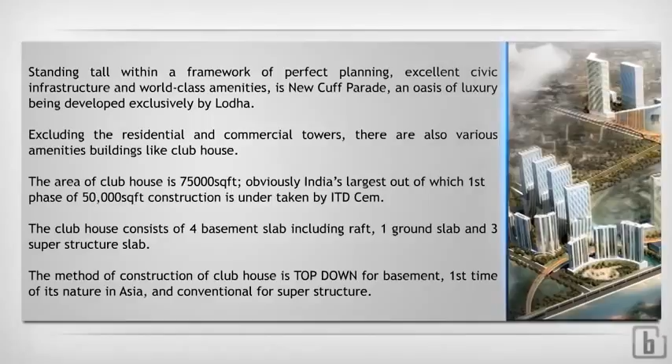ITD Cementation: standing tall within a framework of perfect planning, excellent civic infrastructure, and world-class amenities is New Cuff Parade, an oasis of luxury being developed exclusively by Lodha.

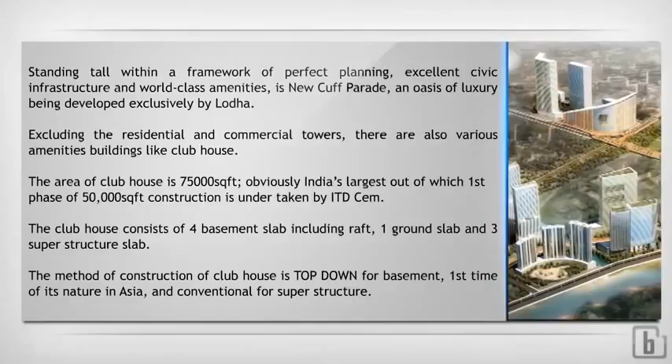There are various amenities, buildings like the Clubhouse. The area of the Clubhouse is 75,000 square feet. Obviously, India's largest; out of that, first phase of 50,000 square feet construction is undertaken by ITD Cementation.

The clubhouse consists of four basement slabs including raft, one ground slab, and three superstructure slabs. The method of construction of the clubhouse is top-down for basement, first time of its nature in Asia, and conventional for superstructure. General sequence of operation for top-down construction. Following sequence is planned.

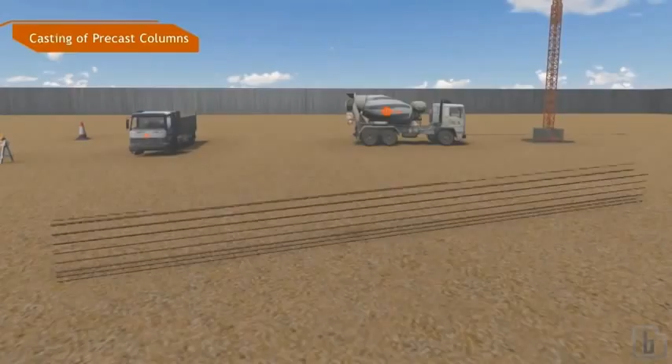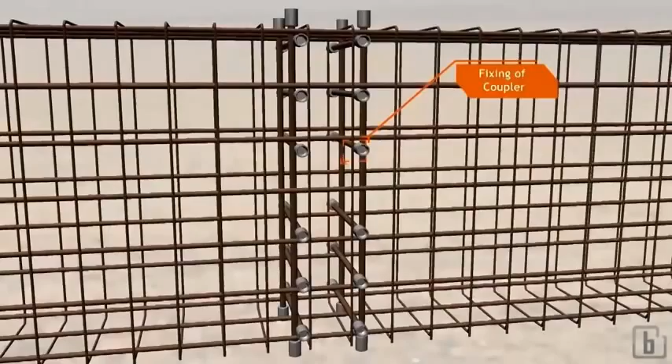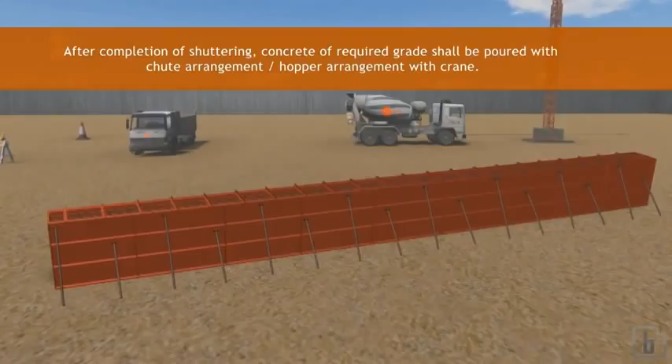Casting of precast column. Reinforcement work shall be fabricated as per approved drawing and bar bending schedule with proper cover block and fixing of coupler at required level. After completion of reinforcement work, side shuttering works shall be carried out with proper dimension and levels with proper support. After completion of shuttering, concrete of required grade shall be poured with chute arrangement, hopper arrangement with crane.

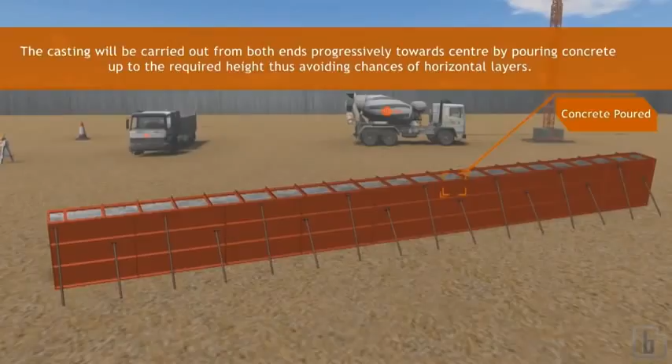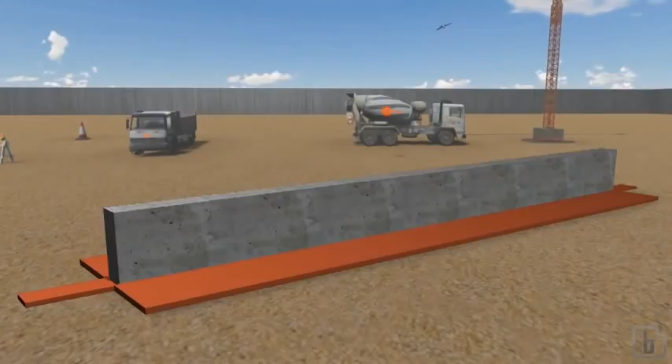The casting will be carried out from both ends progressively towards center by pouring concrete up to the required height, thus avoiding chances of horizontal layers. Side shutter shall be removed after 24 hours, while bottom shutter shall be kept 3 days after casting. This will be re-ascertained by testing of 3 days compressive strength, 40% of the fck of cubes, to achieve the desired strength as per lifting design submitted.

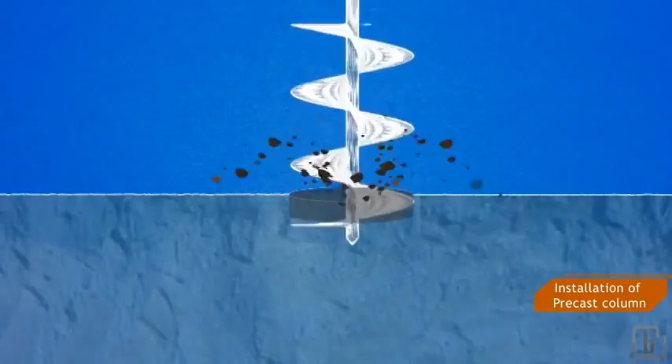Our design for lifting for placing at stacking yard is considered 3 days and for installation of column is considered 7 days. Installation of precast column. On initial completion of approximately 5 to 6 meter pre-boring, permanent liner of 8 mm thick of internal diameter 1300 per 1000 mm shall be inserted into the bore drilled hole with necessary verticality up to weathered rock.

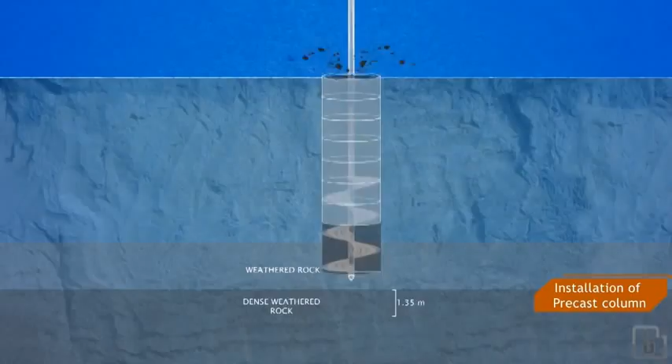The center of MS permanent liner shall be checked prior to commencement of further boring with respect to reference points. The verticality of pile bore will be checked at regular intervals during casing insertion up to rock with reference point as well as bubble fitted with HR 180. Once the permanent liner is centered, further boring shall be carried out with auger and soil bucket till it reaches the final depth as per design and drawing.

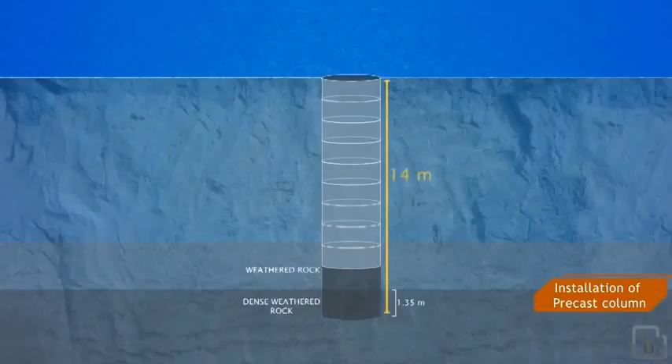The precast column length will be bottom of raft plus 1 meter and pile termination will be 1.35 meter below hard rock encounter. Once pile is terminated, precast column member will be lowered into the pile with the help of crane of capacity 75 MT.

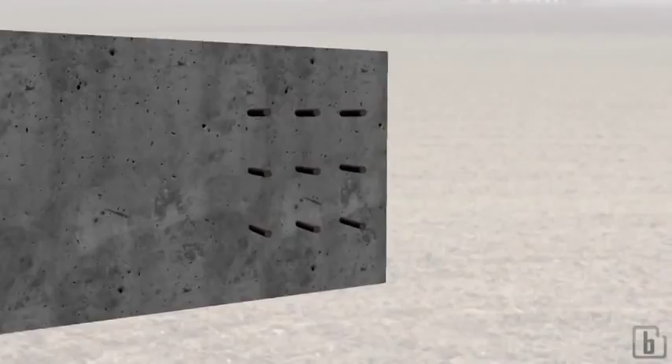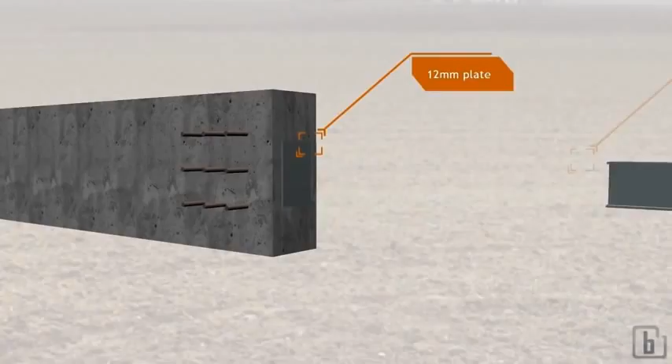After installation of column, the pile reinforcement cage will be fabricated as per drawing with ISMB 300 at center of precast with 12 mm peg plate welded at both ends as shown in GFC drawing. The length of ISMB and pile reinforcement cage will be finalized after borehole termination depending upon site situation.

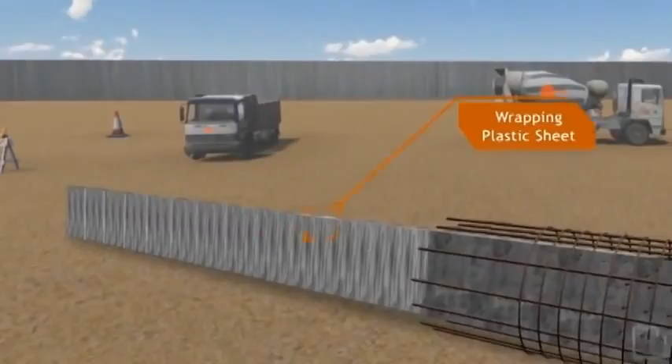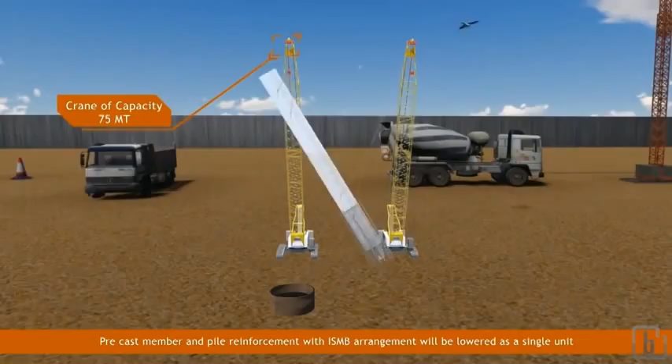Prior to lowering of precast member, it will be wrapped with plastic sheet to have a separation between column and lean concrete which will be poured later. The precast member and pile reinforcement with ISMB arrangement will be lowered as a single unit. During lowering of column, to maintain proper verticality and position of precast member, additional precautionary action of ISMC 150 will be provided at the column corner.

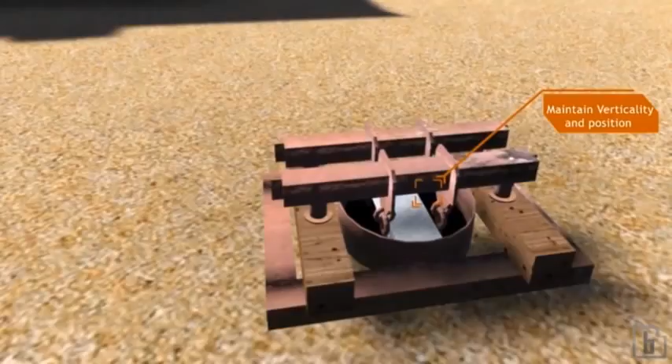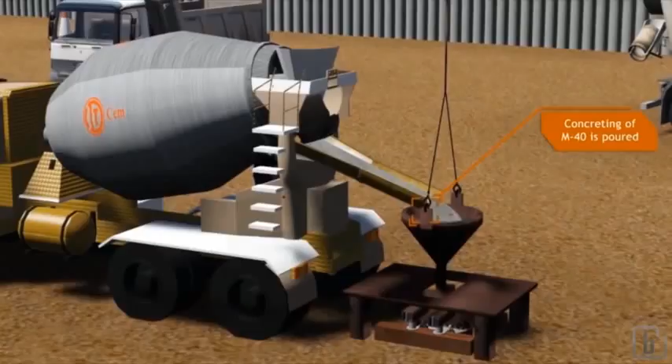Concreting of M40 will be poured up to a specified height of column COL of pile as shown in drawing from bottom to have a proper fixity at bottom. The concrete will be poured up to the pile COL plus additional overflow level shown in the drawing. The level of the concrete will be ascertained by lowering cup fitted with reinforcement steel.

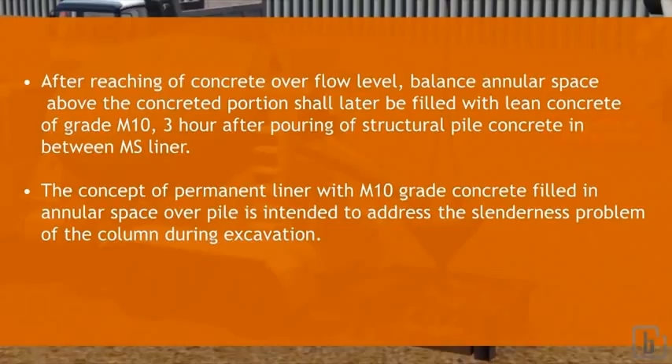After reaching concrete overflow level, balance annular space above the concreted portion shall later be filled with lean concrete of grade M10 3 hours after pouring of structural pile concrete in between MS liner. The concept of permanent liner with M10 grade concrete filled in annular space over pile is intended to address slenderness problem of the column during excavation.

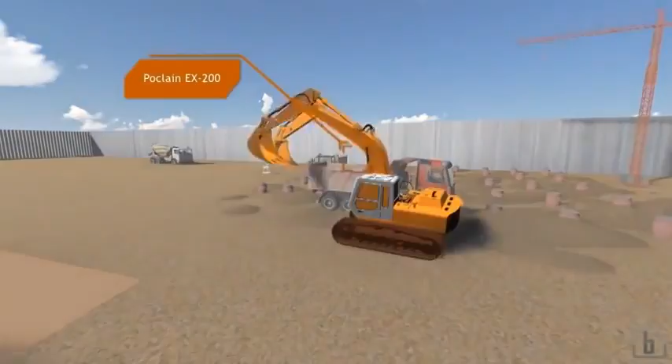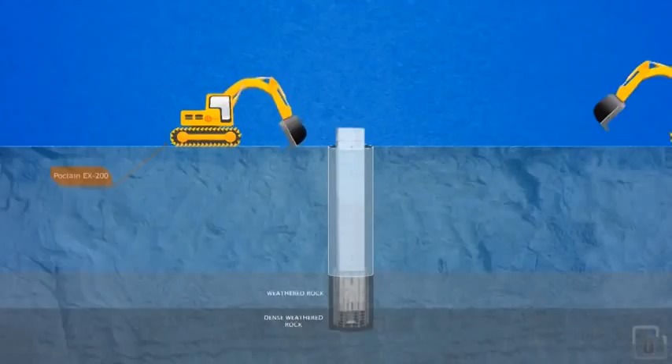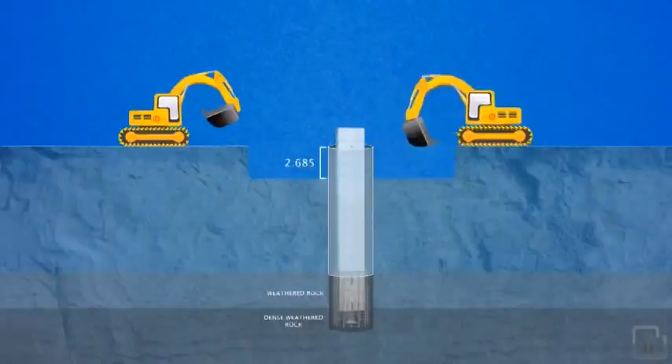Ground floor slab. After installation of column, activity for ground floor slab will be started. For ground floor slab, excavation will be carried out up to level of plus 0.4. After that, the area will be leveled for working platform for receiving rubble soling. Rubble soling. Stone rubble soling will be laid uniformly over the leveled area in one layer of 230 mm thickness.

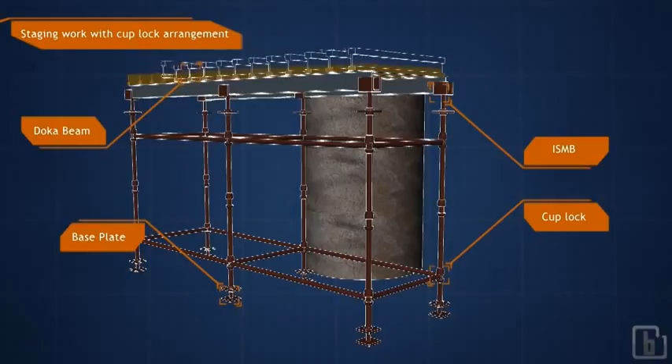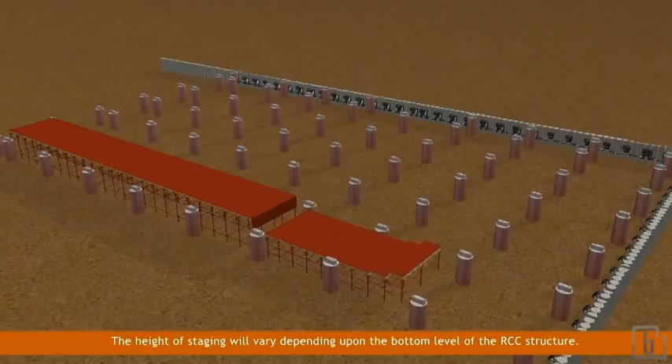Staging and bottom shuttering. Staging work will be started with cup-lock arrangement. The height of staging will vary depending upon the bottom level of the RCC structure. After placing of bottom shutter, as per required level and position, rebar work for slab and beam will commence.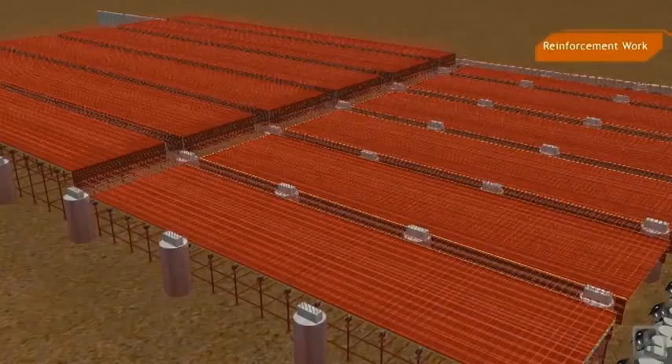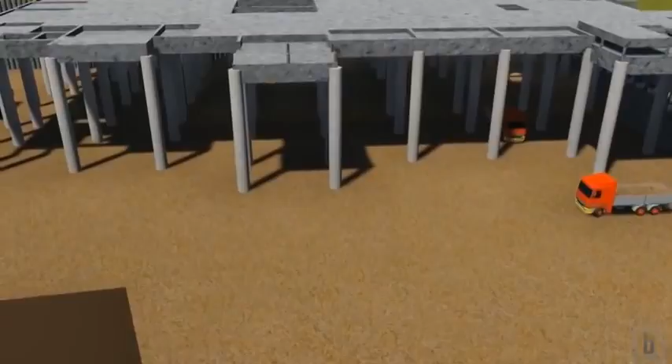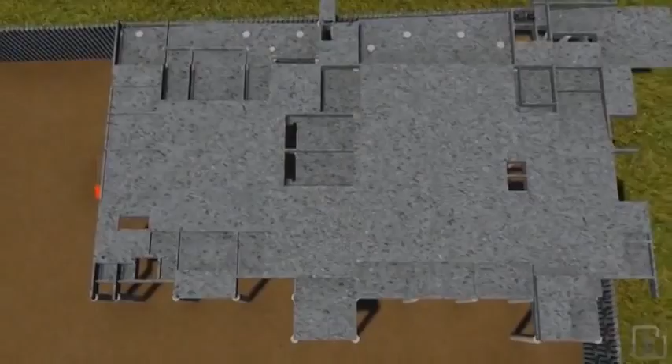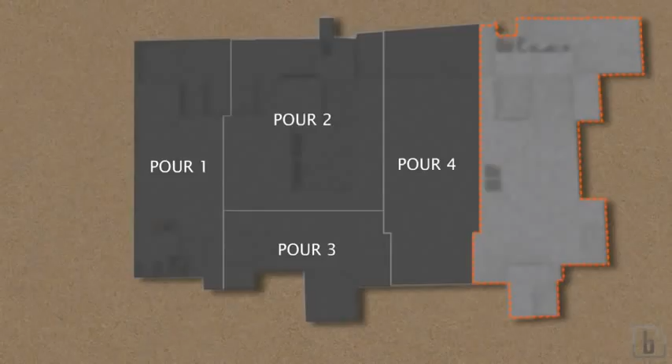Excavation work from ground level to second layer anchor and then up to raft level. After completion of top slab, 14 days curing period shall be permitted before carrying out excavation below it. Prior to beginning of the excavation, strength criteria will be verified by checking compressive strength of cube, that is 70% of the FCK should be achieved.

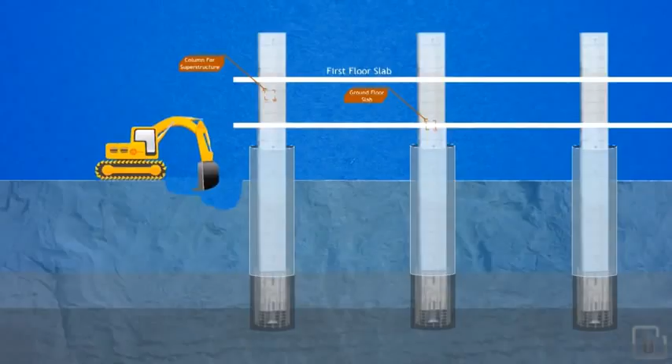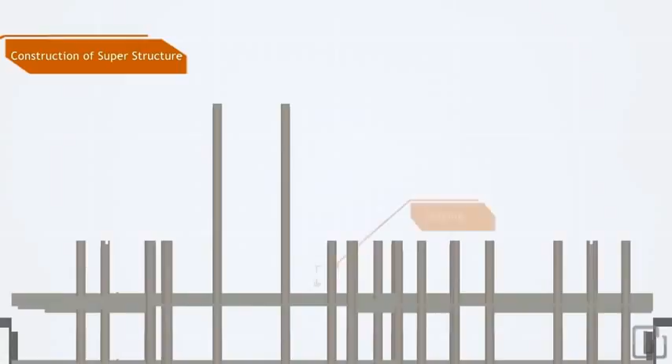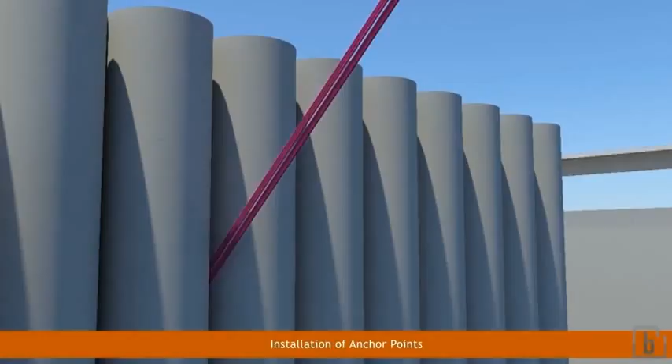After the curing period, excavation activity will be carried out with the help of suitable mechanical excavator, depending upon the available slab-to-slab clearance. Superstructure is simultaneously built while process of excavation from ground level to second anchor point level is in progress. We have planned for excavation up to the second layer rock anchor level. The excavation of second layer anchor will be done up to the depth of 8.5 meter along the shore pile line of 25-meter wide working area.

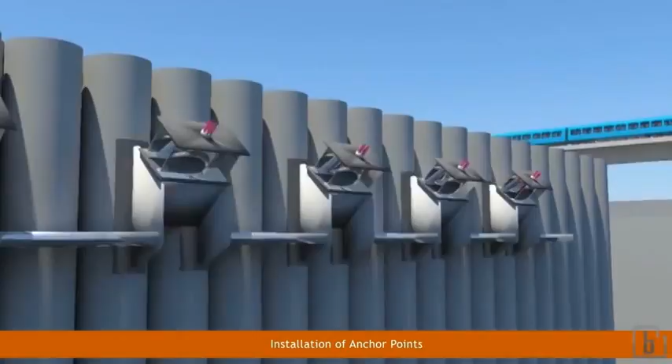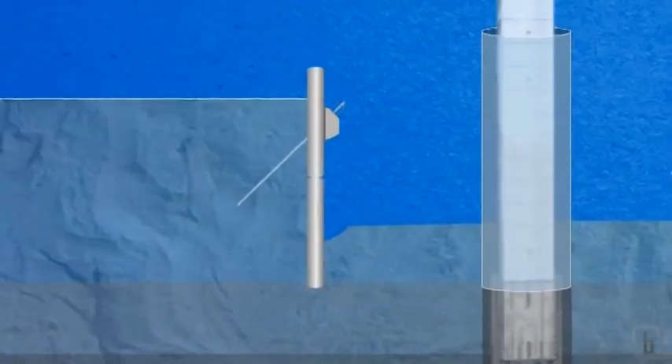Excavation work will be carried out in such a manner that the work commences from open side and proceeds towards the shoring pile side. The excavation will be carried out in slope such that a proper ramp will be available at both open ends for disposal of excavated soil and machinery's movement.

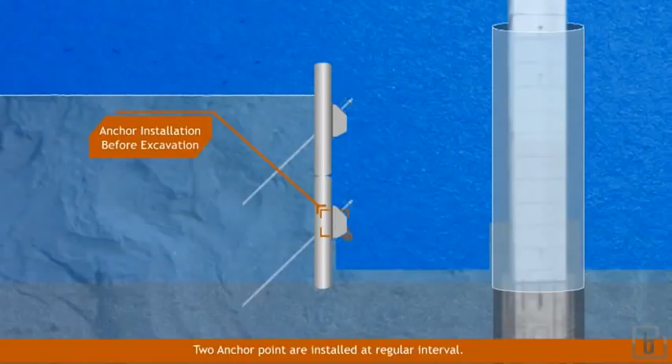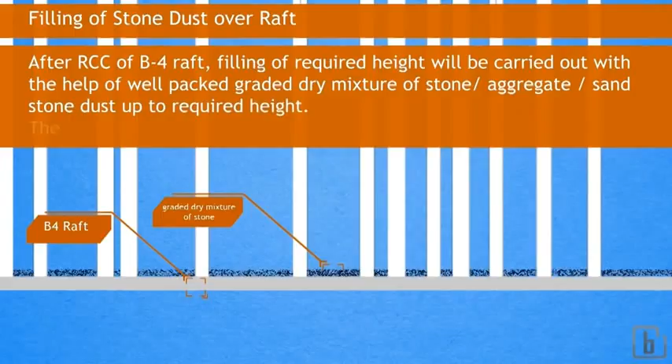Filling of stone dust over raft. After RCC of B4 raft, filling of required height will be carried out with the help of well-packed, graded dry mixture of stone, aggregate, sand, stone dust up to required height. The filling will be done in stages, depending upon the height of filling.

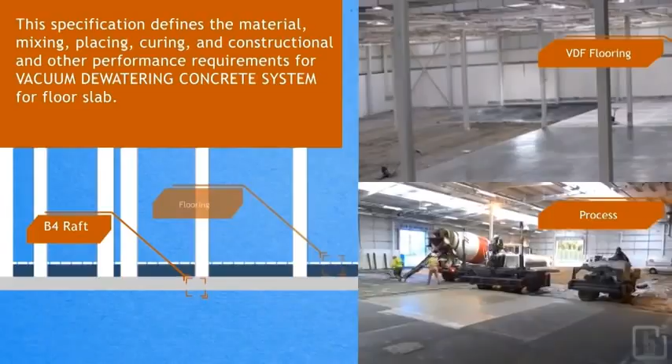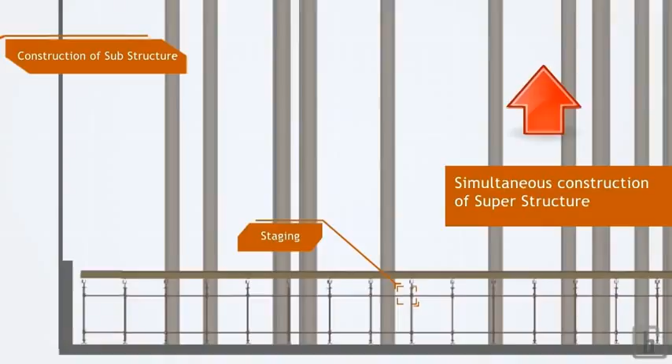VDF flooring. This specification defines the material, mixing, placing, curing, and constructional and other performance requirements for vacuum dewatering concrete system for floor slab. Construction of retaining wall along Eastern Freeway. The eastern roadside retaining wall along shoring piles will be executed with bottom upwards method from B4 raft level to ground floor slab. Construction of B2, B3 and B1 slab.

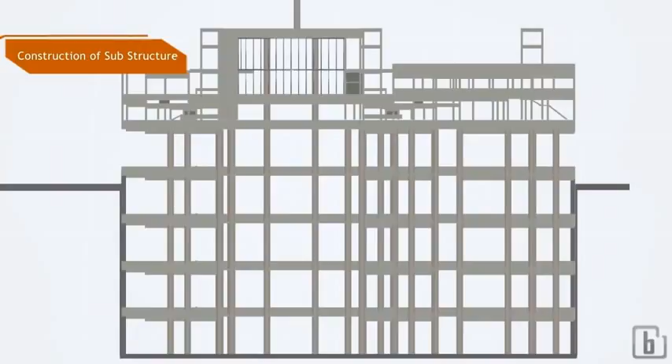Staging and bottom shuttering. After concreting of the bottom raft, staging work will be started with cup lock arrangement. After staging up to required level, bottom shuttering work will be done with 16 mm thick ply as per design requirement after placing runner. After placing of bottom shutter as per required level and position, rebar work for slab and beam will commence.

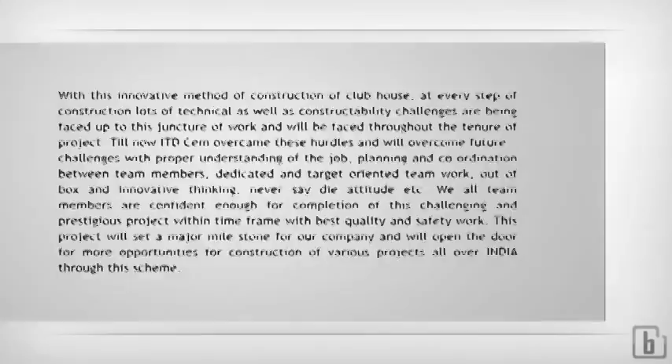With this innovative method of construction of clubhouse, at every step of construction, lots of technical as well as constructability challenges are faced up to this juncture of work and will be faced throughout the tenure of project. Till now, ITD Cementation overcame these hurdles and will overcome future challenges with proper understanding of the job, planning and coordination between team members, dedicated and target-oriented teamwork, out-of-box and innovative thinking, never say die attitude, etc.

We all team members are confident enough for completion of this challenging and prestigious project within time frame with best quality and safety work. This project will set a major milestone for our company and will open the door for more opportunities for construction of various projects all over India through this scheme.